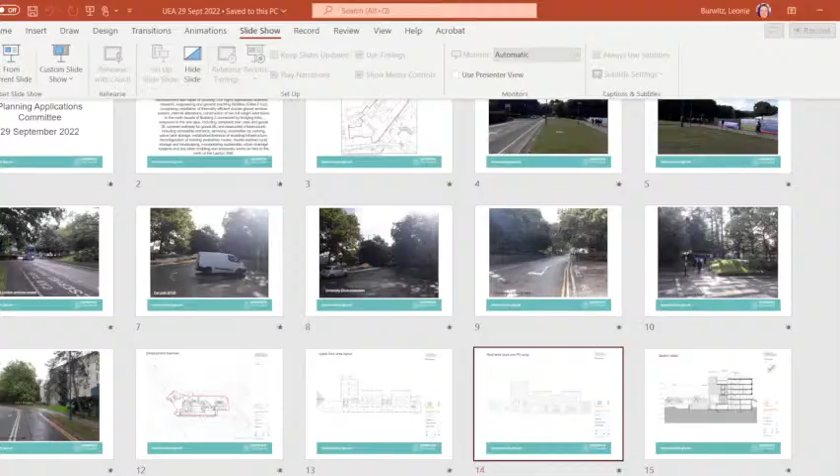You also get a sense of the PV array which will be going on the building to meet some of the energy requirements through policy. So looking at things which are pulled away from the south elevation, with screening and plant focused more towards the back of the building.

Then here you see the bridge connections and the oversailing plant and equipment at the top. You get a sense of the ground level adjustments coming through into that service area for the new bin and access points, and you also see some of the link-through swale features as part of the sustainable drainage.

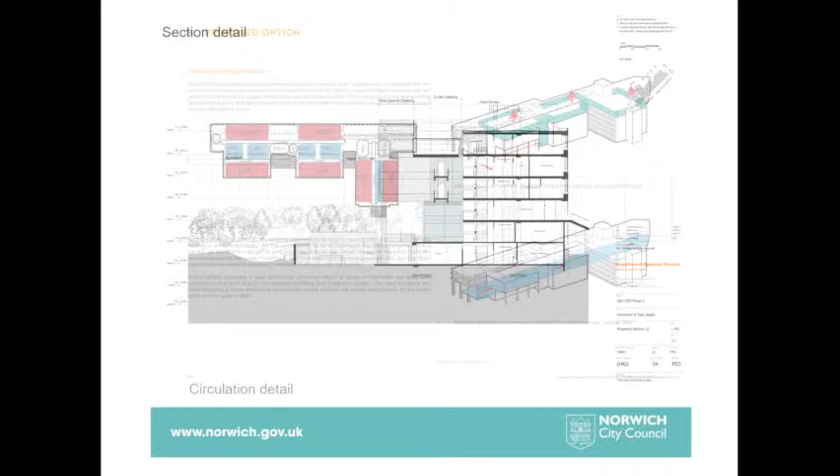Looking at the original principles, we wished to see what was originally a design intent for Lasdun itself, to have interconnectivity through the entirety of the teaching wall, with fluid relationships between all of the faculties using the building. So what has been introduced at certain lower levels is a potential to connect through to the building. This is beneficial in terms of educational purposes, but it's also beneficial in providing an acceptable, welcoming and level access for people with disabilities.

At the present time, the teaching hall itself is incredibly difficult to access unless you are at one or other end of the building, and it's served primarily by stair access from the walkway levels.

Looking at some of the detail of the requirement for modern day research and science layouts, the university has been looking for an increase in depth to give an ideal building depth of 28 metres, which provides for lab accommodation and offset ancillary lab spaces and breakout teaching spaces. Going through the building, the areas in red are predominantly lab spaces, and we have other teaching and learning spaces in green.

This has been developed further, so we have an idea of the flexible mixed-use nature. We also now have the School of Engineering coming into this part of the building. They have recently established in what is the Institute of Productivity in Building 6, down close to Sainsbury Centre, to enable potential future phases, future-proofing that particular faculty to move into this building.

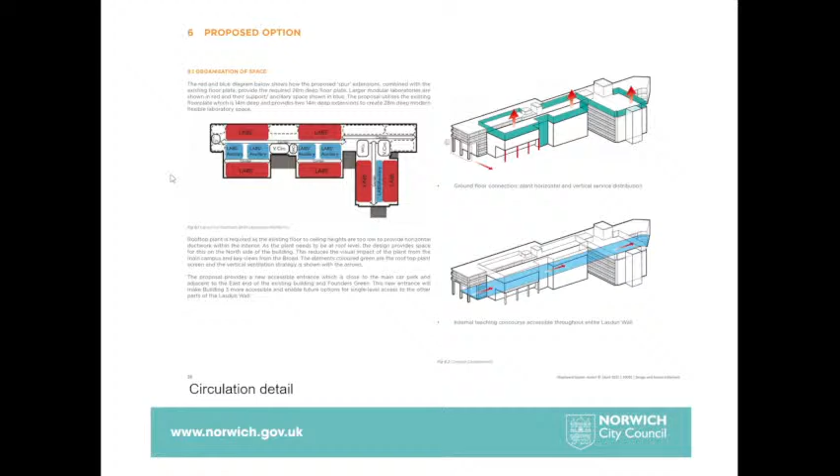All in all, it's been a useful dialogue and conversation with the university to enable them to manage their growth and refurbishment of the teaching hall, but also ensure some reliability in terms of high-grade spaces which aren't likely to cause them problems in the future, which in turn de-risks operations on campus and especially within the teaching hall.

So if we look now at the view from the harbour, the teaching hall itself is potentially seen as a backdrop as you view through, and the harbour was originally designed by Lasdun as a cut-out welcoming space to give that sense of a set of buildings sitting above a valley in Italianate style.

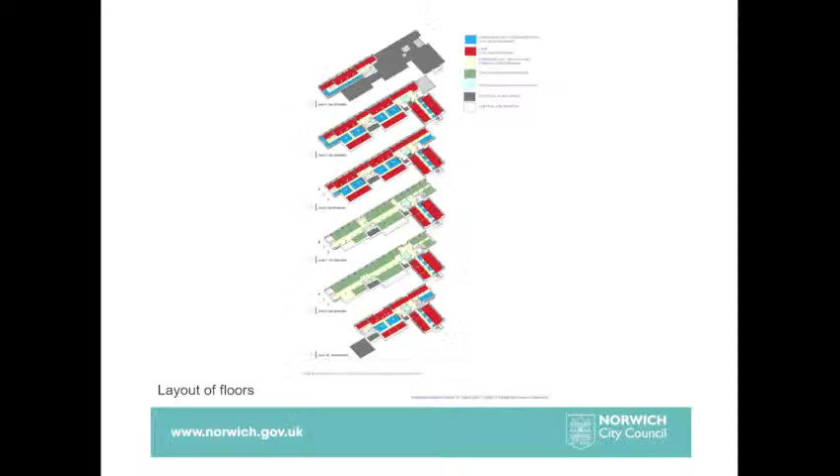And then we have the very distinct nature of the teaching hall, which provides this strong strata sitting behind, punctuated by some of the service halls which run through the building and other elements which have been agreed in the past for services on the roof.

The walkway, which runs through here, is also part of the listing on campus, and the teaching hall itself is Grade II listed.

The relevance of that is in relation to what Lasdun originally saw. I think this is the second version of the master plan for the campus. You can see some elements have been built, some areas of ziggurats which have been built, and areas of the main teaching hall which have been built.

Originally it would have gone to roughly where the Sainsbury Centre is at present, with additional ziggurat buildings wrapping around this edge and running down into the broad area. The key area to focus on is where we have what has been built to Building 3 and the chemistry section, which would have been built as a spur connecting to an entirely separate second teaching wall - that being the original intent.

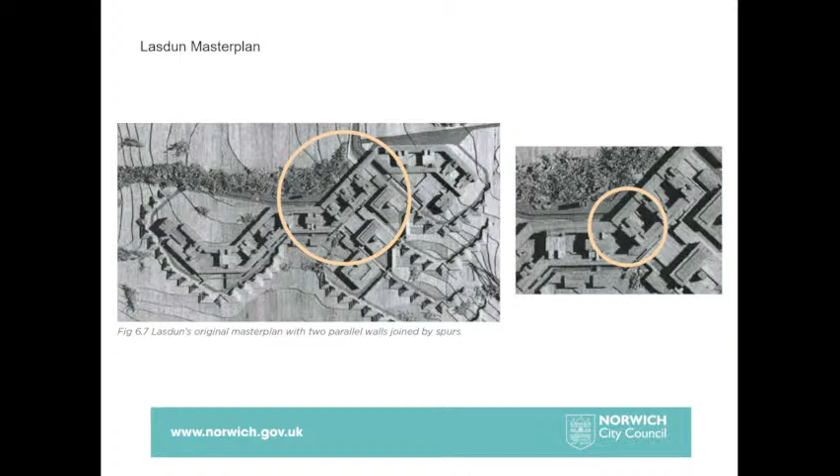So the buildings of interest within the immediate vicinity are Registry Tower, which is of architectural interest. We have Founders Green, and certainly the east end of the teaching hall, which again are of landscape value and heritage interest.

This end, I believe from memory, was finished by Feilden and Mawson as a later part of works by Lasdun, because when Lasdun had developed on the site in the 1960s, there was a series of parts of the teaching hall which were later infilled in a slightly different style by Feilden and Mawson in terms of their interior, but they certainly, as you saw from the early image, kept that main focus of the strata and the horizontal strength of the teaching hall in terms of its architectural presence.

So the proposal, you see here the east elevation, so you see these various elements. It becomes, as I say, separated and a subsidiary building because it isn't competing with the strength of banding on the east end and the views from Founders Green.

And then you see the clearer side elevation of the art spur. There is some addition to the roof of the art spur, as there will be some addition in higher levels in terms of the height in relation to the main teaching hall.

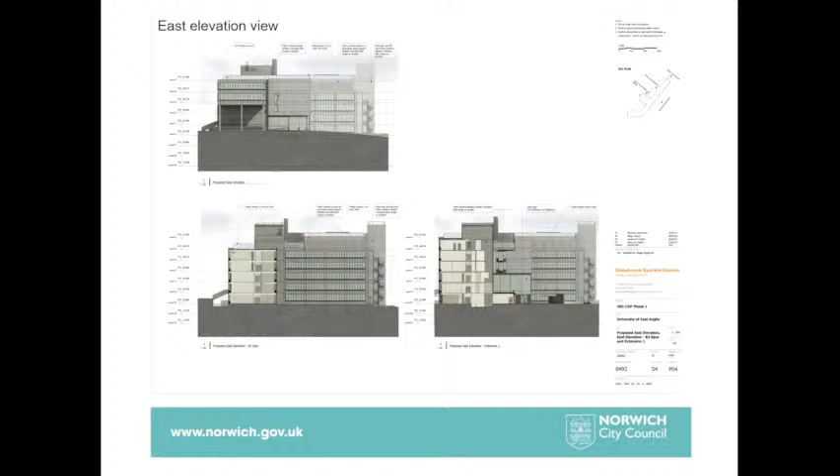There will also be this new lift, but the existing stair of interest is retained and kept visible. And then we see here a section in the opposite direction as well we saw earlier, giving a sense of some of the heights of spaces as you go into the building and the bridge link between the two extensions.

So we have the edge view of the existing concrete service tower and the edge view of the north of the building. And then we have east side of the art spur, and north of the existing service tower, and then the north edge of teaching hall, Building 3, and then this is just a cut in.

So the extension itself, through negotiation, has been set back from the very front edge of the passageway at the east end of the teaching hall, so that fabric is retained as an element.

We've also asked for this area of the service tower to be kept exposed, and through negotiation we've also stepped the building away from the art spur. So you now see key areas of the building retained and visible, with the two new extensions and link being a prominent new step.

Of interest, when we start talking about the design of the building, we didn't necessarily want it to mimic the original building. We felt it important that it becomes a new entity in itself, given that the university was stepping away from the idea of introducing a second wall as part of the original Lasdun master plan, and instead it becomes more of an extension along the lines of the BMRC, or possibly even the thin connection to CISA, or even the sort of connections you see through the Lawrence Stenhouse building.

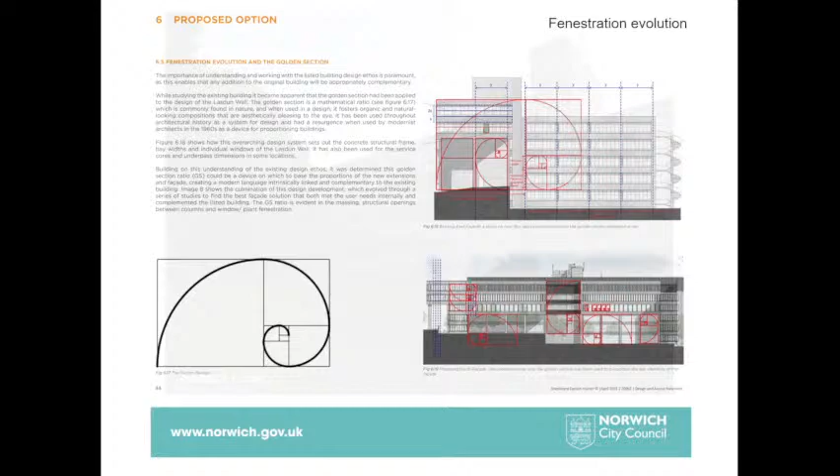So again, service tower, which is left exposed, and then, as just mentioned, the escape stair, which is of significance, because we have here effectively an unfinished element of Lasdun, which has significance in itself in terms of the history of the building. So if you'd imagine that this would have linked into another teaching wall, roughly where the people are walking at the present time.

So this concrete stair is a sort of well-designed, I say temporary, fixing has been there some significant time now. But over time it's become important in terms of its relationship to the building and in understanding the history of the building.

So we see here the entirety of the north elevation, where those elements are clearly visible, with elements of historic fabric retained. The idea is also that within these double height glass spaces you would still have potentially some of the panel features and window openings retained within those spaces, so as you enter the building there's still an appreciation of the original architecture.

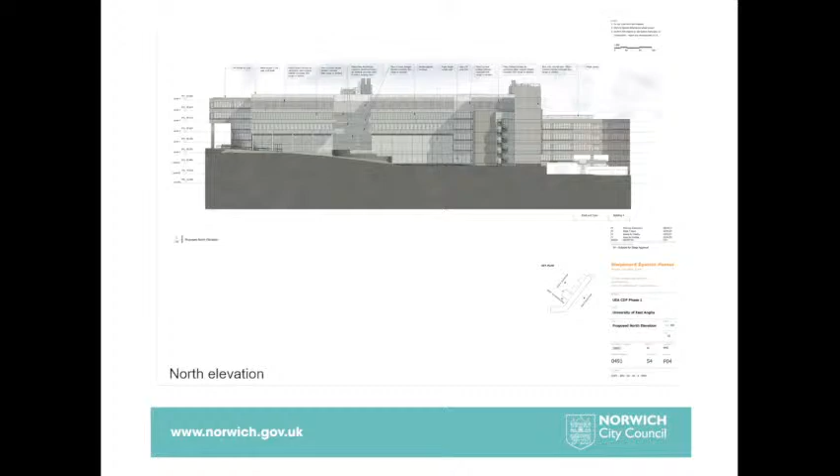So we have a section through showing part of the complication of the teaching wall. The added complication is the very way it steps down the valley, so you have floor areas which are in part subterranean. We have the opportunity to introduce a link through at the end of the side spur into a new lift, which then solves part of the problems in how you service the building.

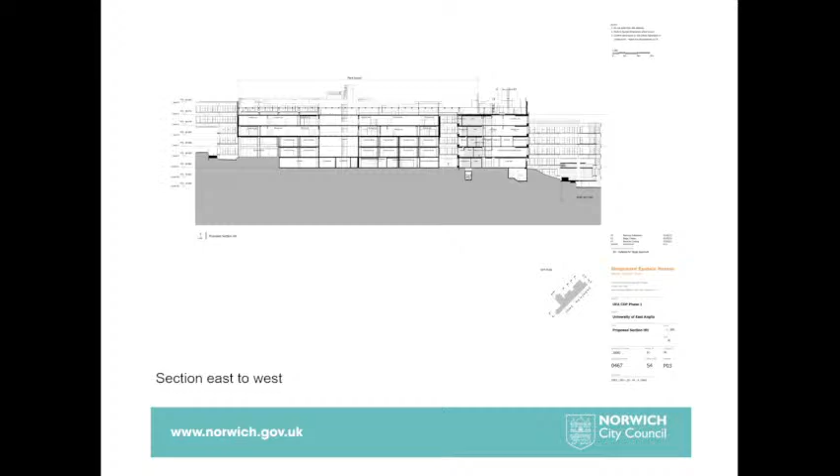So whilst there will be a retention of fabric through here, there will still be some service access with the disabled parking bays just beyond this area of landscaping, because the car park also has to change in level to get improved and level access coming off Chancellor's Drive. We've also asked for the surface to be cut back so it doesn't impinge on the building or run up to it. The building is still announced as a separate entity.

It will be a similar arrangement to the Enterprise Centre on some of its elevations, certainly the elevation as you walk next to the Rose Garden on Earlham Park, where you have a line of flints dropping down in an area, providing a design feature but also keeping the extension and other works away from the core building.

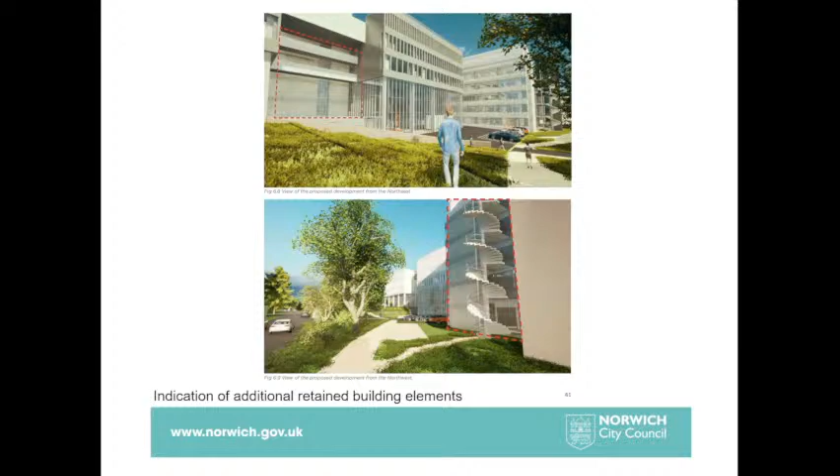So here we have an indication of the retained elements which have been negotiated as part of the pre-app process. Behind the concrete stair will be a new glass wall, linking through into the new lift on the building, giving access into the end of the arch spur, which will again improve functionality. Service access is as existing, but will be widened.

There will be some loss of trees, but those are primarily within this space, with this grouping here at the lower end, and we'll probably see some of the other trees that are lost in a moment.

So, an aerial shot giving you a sense of what is being proposed. Cut back from the end, we have a repeat walkway portico feature, a double extension with bridge links, and a large amount of servicing which is screened on the roof, though the screening is pulled back to limit its impact. Then we have the lift on the arch spur, a glazed wall, and an increase in height of the arch spur itself.

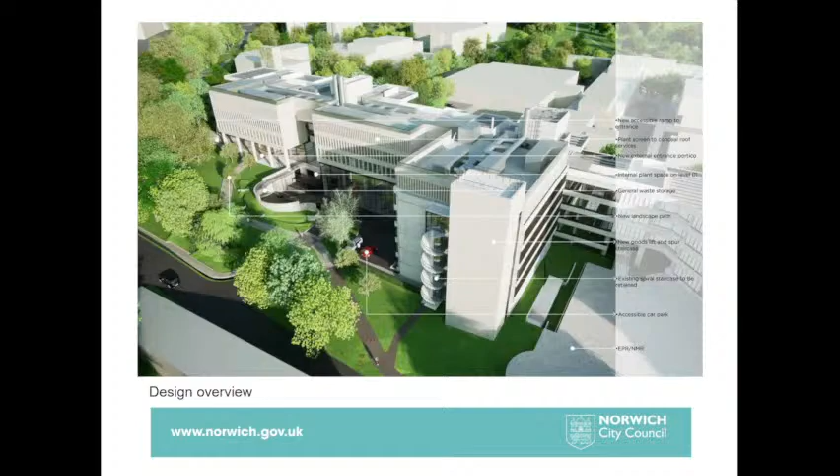Looking at the tree screening, this should be mainly retained, so the building will be visible through predominantly deciduous planting with a mix of some evergreens in this location. So in the winter period there will be some visibility of the building, but for most of the rest of the year it will be reasonably well screened from the wider area.

As you can see here, as you're on site this morning, some of you'll see trees on this side of the walkway being removed, and the intention is that you'll have a swale feature running through here.

In terms of tree removals themselves, we have a small grouping here, and then to enable the extensions and improved access, we have a tree coming off the corner. As you come through the existing walkway, it just opens up this space a bit more to allow more people to come through the various walkways.

Obviously one of the problems we've had over the years with the university is the movement of people, cycles and vehicles. So we've had discussions about a movement strategy and about ensuring increased potential and increased capacity, so people can actually move through the space easily and safely without causing any difficulties.

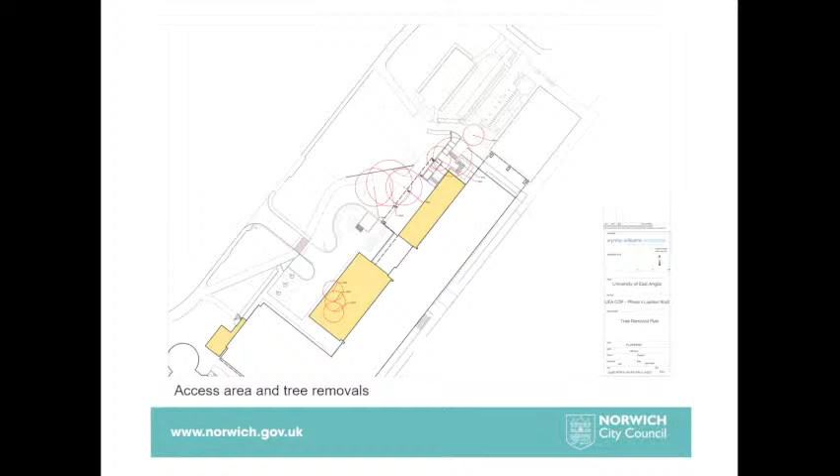So the landscape design incorporates elements of new tree planting within the site itself, green shrub spaces and hedge planting, and improved hard surface service areas.

We have a sunken potential seating area, akin to the central square of the university, with links through to cycle routes. We've looked at some design lines on the cycle parking, incorporated into the landscaping scheme. Where we don't want people moving through the space because it's unsafe or inappropriate for defensible planting, we've created areas of shrub and hedge planting to direct people, because at the moment, especially around the cycle parking, people go off in all different directions, so we're trying to manage that arrangement.

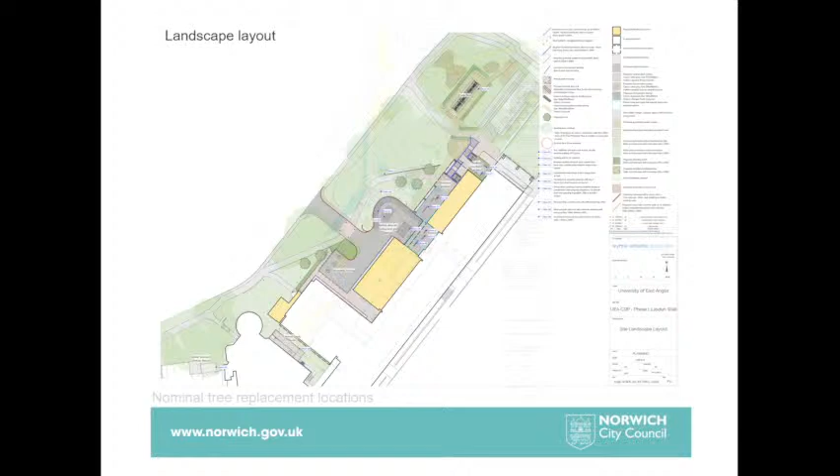There's also talk about some nominal additional tree replacement, looking at locations along Cow Drive and other potential spots within the campus. That's part of an ongoing discussion about appropriate numbers for tree replacement to meet our specific tree policy at DM7. We're also having further discussion about a green infrastructure strategy for the university, to build in future-proofing and biodiversity net gain, which is required to be off-site for this location, but also potentially off-site for other future development on campus.

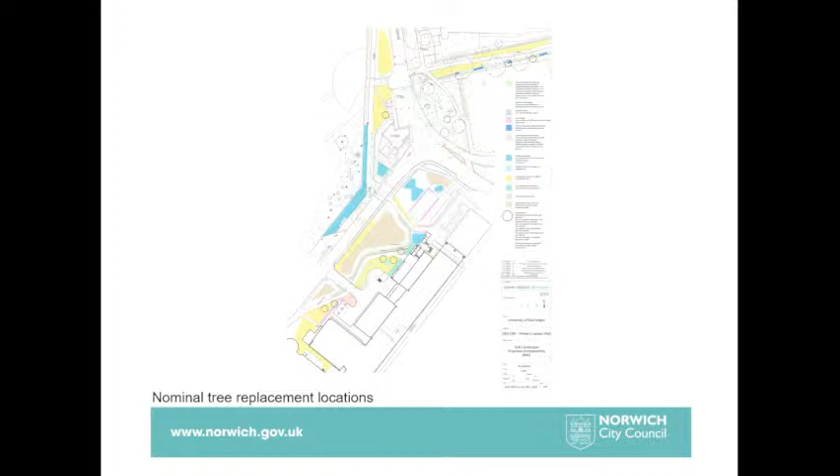So we have a view here looking northwards along University Drive, and you can see the cycleway coming off - it's a pink pedalway where people either come down to the roundabout and into the cycle parking area just behind me, or cut across onto that main route. We saw earlier where people come straight into campus - cyclists can then miss that roundabout and go straight down Chancellor's Drive.

So we have the existing cycle area in this location. The new cycle area is basically in the same spot, but with improved landscape and landscape screening - instead of a single tier arrangement, there'll be a two-tier arrangement here. We've also had comments from Norfolk County Council about improving this area to provide clearer, safer, and more level access for cyclists as they cut into the roundabout and onto this section of University Drive.

There's some work still to be done, but we've agreed, negotiated through condition, to improve the levels here, and potentially extend this in length to incorporate the existing service - what's been a temporary drop-off for the park and ride buses. If that continues, there's improved access for both cyclists and bus users, and potentially a better level removing some of these step areas, improving access for pedestrians and people with disabilities.

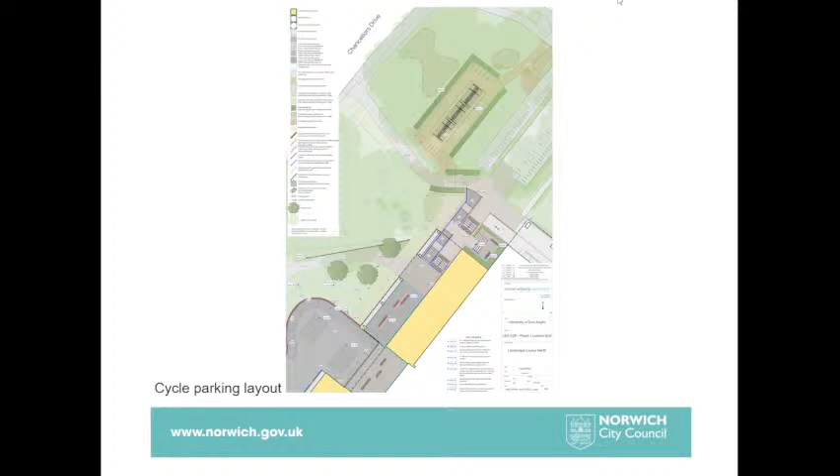We've also looked at the question of how we manage increased floor space if we're only re-providing the same number of cycle parking spaces. At present, the intent is that building 6, with the teaching wall at this end, once decanted into building 3, would remain empty pending its second phase refurbishment. But in the interim, if that didn't happen, we've asked the university to revisit this, because we've granted consent for substantial cycle parking next to the congregation hall, and a reasonable amount on top of the boiler house, providing extra cover for the new science building, building 60, at the end of Chancellors Drive.

We also looked at enhancement through the School of Engineering Productivity East, with improved covered cycle parking in this location. So these two developments have gained a potential improvement in cycle parking here and on site, with, if there was a shortfall, potential through the Sky House building that we considered two or three years ago - this consent was secured to enable a larger, more rationalised approach to cycle parking.

So it's a 2-phase consent. If there was a shortfall, then either of these consents could be pulled into use to bring back appropriate levels of cycle parking on campus.

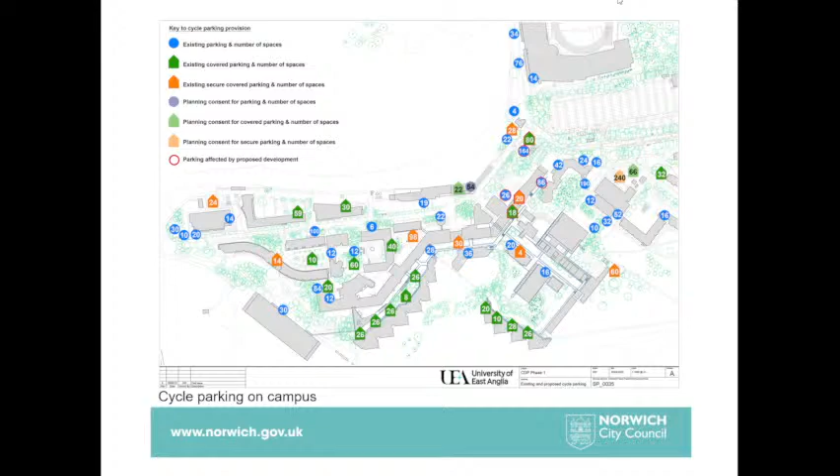One of the other things that we've granted recently is these horrendous temporary fixings because of the difficulties the university were having with the safety of spandrel panels. Spandrel panels are basically large chunks of concrete which form a significant part of the architectural value of the building.

They were found to have some metal corrosion in terms of their internal fixings, partly because of water ingress, because of the design of the windows, which we'll mention in a few moments, but also partly because of age. It was becoming a problem in high wind conditions or bad weather, as there was a fear that these could become demounted from the building and fall.

So as part of a very expensive process for the university, these temporary fixes have secured these elements in place in the short term, and the intent is that these would be removed as each phase of refurbishment went forward, to bring the building back to a cleaner, crisper design.

Other parts of the proposal include, it says CRU there, which is a mistake, so I apologise. This is chemistry, I believe, with some bio research at the end. So this building is Feilden and Mawson, built in the early 70s as part of the chemistry connection.

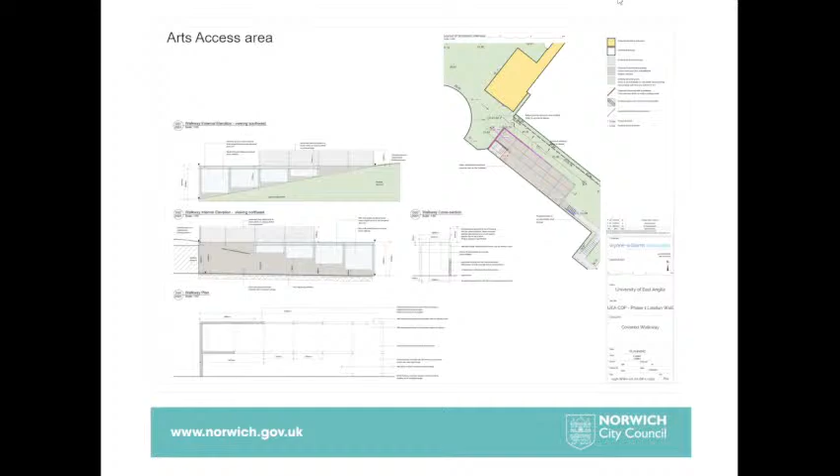Within this location, we're now looking at a new bin store and saline tank store. The design features here repeat those on this and on this building. This repeats design details which we've agreed for the Productivity East, and this building repeats design elements for standardised bin stores in the service ground below the walkway, such as that you see below the ITCS building.

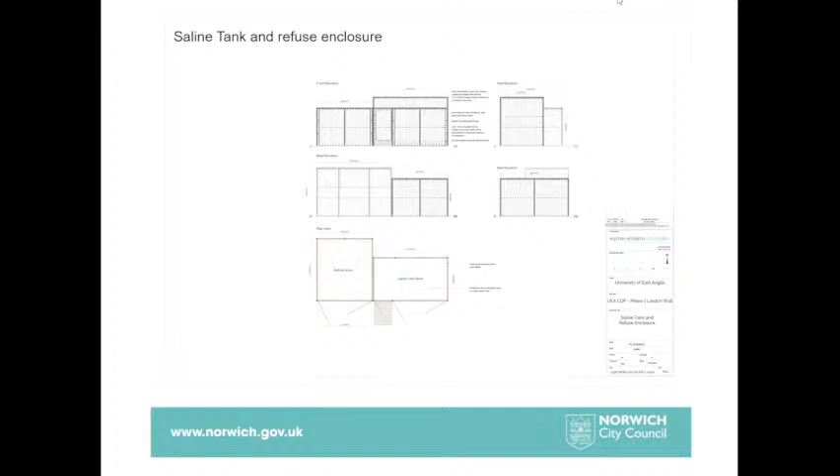The other thing in terms of tree impacts in this locality is the pine stand just to the south side. So if you imagine you've got a new store going in this location, we've asked for an arboricultural method statement and a no-dig foundation solution. So we would have something sitting on what is semi-existing hard surfacing, but it isn't going into the ground, so if there are any tree roots, those trees should remain unaffected.

One of the other issues before us today is the replacement of windows on the building. There's been some initial objection which has been reduced in terms of its observance from various heritage bodies. The 20th Century Society, whilst they maintained their objection to the extension, have now removed their objection to the replacement of windows. And Historic England have also downgraded their comments, now seeking conditions on certain details of the new window scheme.

So here we have more of a sense of how that sash works in terms of the mullion detail. And you see here one of the other problems which has been caused partly by the decay of the spandrel panel fixings: this hidden gutter, which you wouldn't know was there, but all of that drains internally to the building. You also see the unfortunate metal fixings because of the problems this has caused to the fixing of the spandrel panels, and the over-engineered potential solution we've had to agree to enable those to be kept on the building.

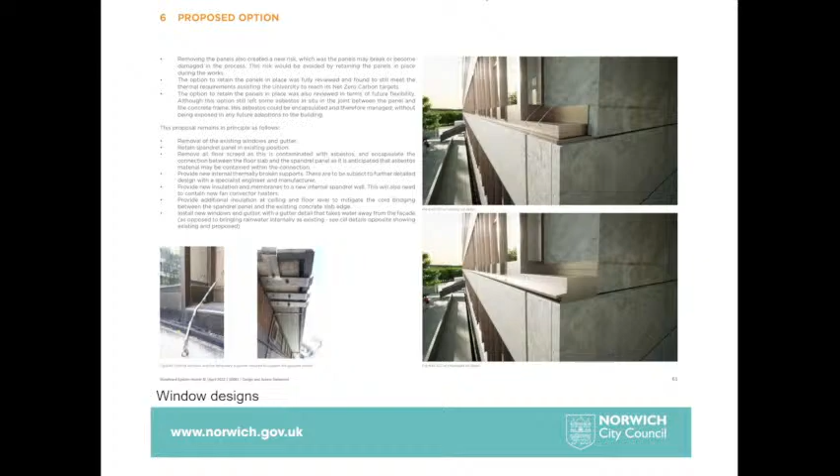What we're focusing on here is obviously the banding of the window, but what's also important is the way that some of these roof elements step out and over and then step down the building. Because if you're trying to screen an enormous amount of plant machinery required for a science faculty, similar to what we had to do with Building 60, it needs to be something which is reasonably large, but designed in a manner which is reasonably recessive. That creates its own design problems and design questions.

So it's a case of, okay, if you've got to put all of this on top of a building—and you'll see from the north elevation it's been designed in as a separate piece of architecture in a way, with elements of cladding and glass. But on the southern side, it's been pulled away from the edge and any plant enclosure minimised. You see here the detail I'm talking about in terms of the stepping and the overhang of the concrete, which is extremely interesting in terms of the building design.

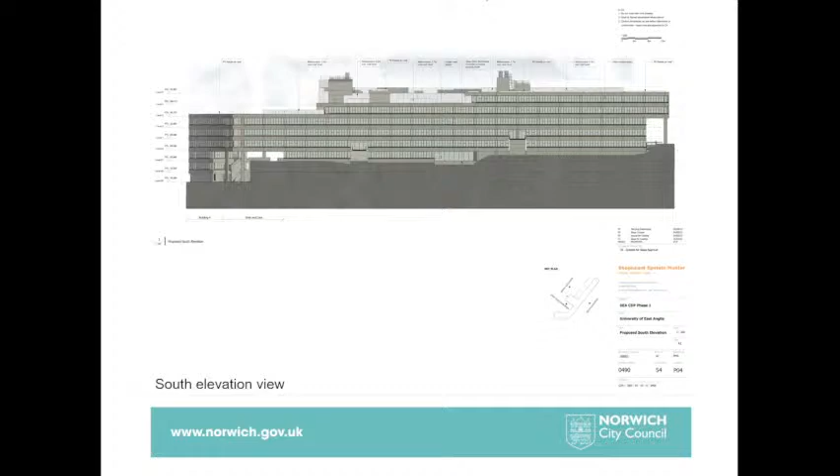You also start to see some of the service towers, which again are important in terms of the building design. You'll see from the earlier elevation we've pulled that back. So whilst there will be some visual relationship, I think it'll be key in terms of how those materials are chosen at the end of the day as to how successful that will be. I'm confident that the university will be able to achieve a scheme which doesn't impact on the relationship with the building and its architectural elements.

Certainly from the south side, because I think both Historic England and the 20th Century Society see that as being a potential problem. Historic England have not, as such, withdrawn their comment, but they have reduced it in terms of its content, in terms of their acceptance of a screen at roof level.

They have, in a way, more aligned themselves, given the changes which were made during the application, to—instead of being a singular plane of screen on this side of the building—be more something which is stepped in and out, which then repeats some of the architecture. I think they're comfortable with that type of approach, but again, I think it comes down to the detailing and the material finish at the end of the day.

Some of the other key things we've considered are in terms of heat loss from the building. Many of you may have seen this image before, where the teaching wall glows quite brightly in the dark, taken from a thermal imaging point of view. The idea through improving building fabric and replacement windows is to reduce that level of impact in terms of heat loss, which will help the university in terms of their net zero targets and their ambitions for campus in reducing maintenance and energy costs for themselves.

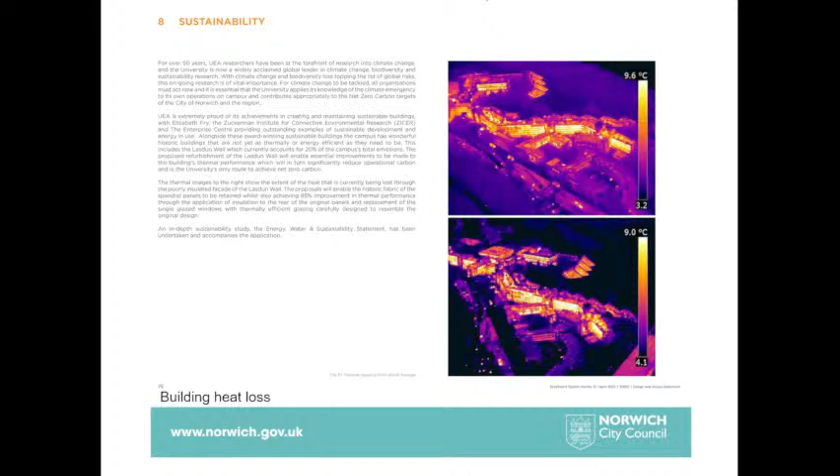The other thing that you may have seen today is some of the asbestos issues which are prevalent through the building.

Some of the strip back to frame is achievable, but through discussion we suggest there will retain be elements where the spandrel panels can't be removed, because there's no way that, as a local planning authority, we could see that fabric could be protected and then refitted. There will be small elements of asbestos, but that asbestos will be hidden within other coverings and new lines of insulation within the building.

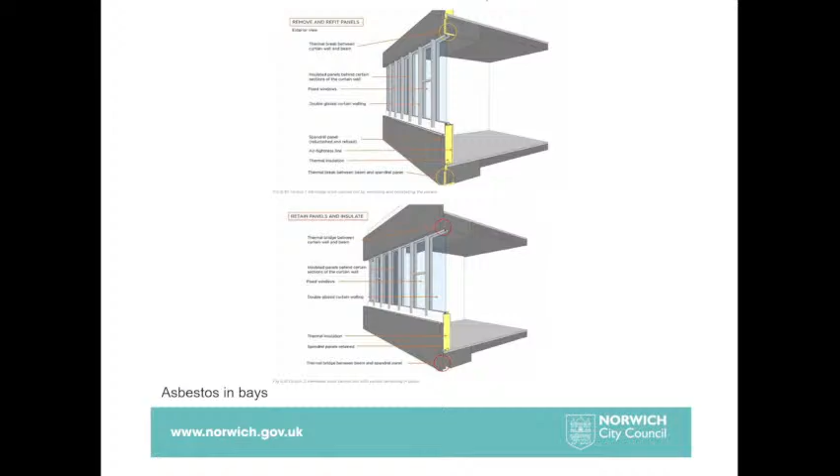So I think that is the slideshow done. So I'll take you back to an overview image.

I think overall, as per section 66 of the Listed Building and Conservation Areas Act, the planning authorities have special regard to the desirability of preserving the building, its setting, and features of special architectural or historic interest.